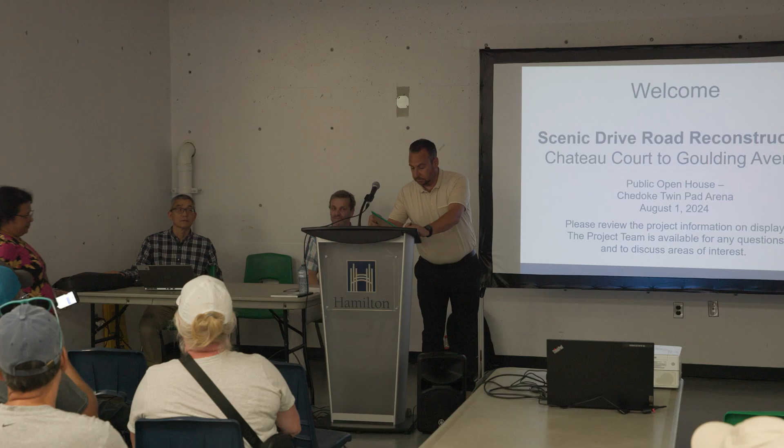Good evening, everyone. Hope you can hear me okay. I want to thank you all for coming out for the meeting today. We want to discuss with all of you the Scenic Drive road reconstruction, which is planned to start in 2025. You just saw phase 1 of the Scenic Drive construction last year. We started early last year, finished off early this year. So you have seen some of the work that has happened in phase 1, but we want to show you what we are continuing with in phase 2 as well.

We do have some plans for phase 3 and phase 4. We are not there yet. We have continued plans of continuing on Fennell Avenue with this whole construction. What we would like to do today is introduce the project team that is available here for any questions. I'll do a brief presentation for all of you. It is almost the same things that you saw on the display boards, but they will be able to explain it further. And if you have any questions, we are here to answer. We do have people from various different departments of the city.

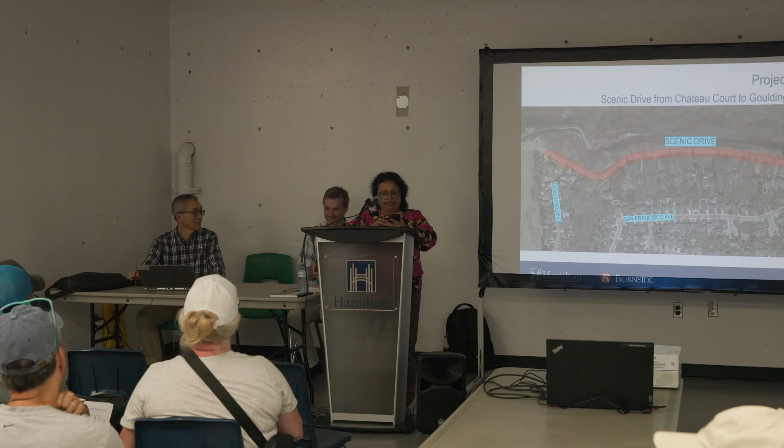The few other members that I want to introduce are Ji Zeng. He is up here. He is the project manager from the City of Hamilton, the lead on the project. Omo Ajay is the senior project manager, works along with Ji. So we have a good team here to be able to answer any of your questions. We have Prashveen Bhatt. He is at the corner there, and he is a design technologist. And as the Councillor already introduced, Caroline Ryle, she's the Director of Transportation, so she's here to answer any questions related to transportation issues, traffic issues.

Good. Alright. And we have Becky. Becky is also a project manager from the City of Hamilton in the transportation section. Wes Kinley, he is the manager of landscape architecture. Any questions related to trails, lookouts, anything related to trails, he should be able to answer that. So we have a whole team in front of you. Should I cover everyone? All right. So with that, I hand it over to Wojtek, who will be taking you through the presentation. Thank you.

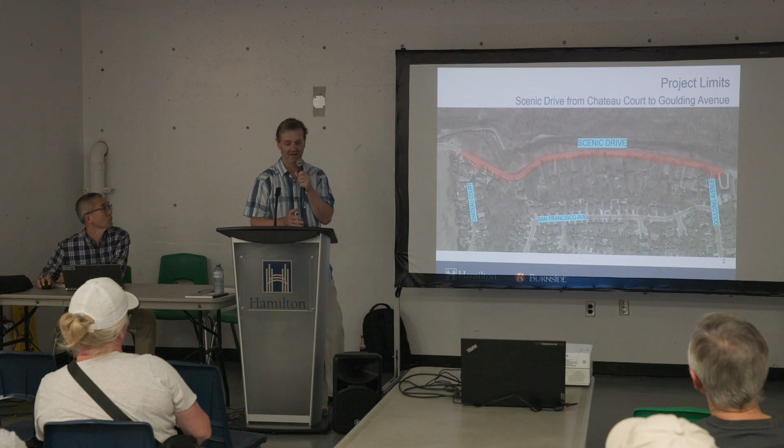So an approximately 3.5, in some locations 3 meter, multi-use path will be provided on the north side. And this will be along the escarpment, including nice iron face fencing. And on the south side, we are proposing the sidewalk that is mainly directed to the local community for safety walking improvements. And this sidewalk, I'd like to mention, will continue going west from Goulding and will be extended in the future up to the Guard Street.

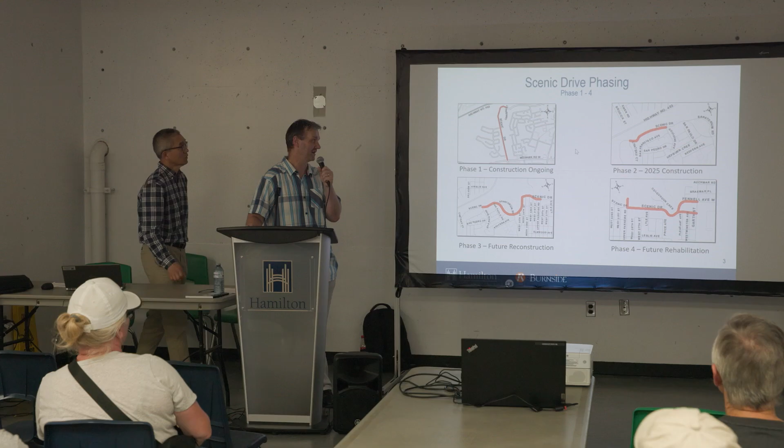I'm sorry, I have to go back 2 slides. So as you probably know, because I assume there were previous presentations before, the whole reconstruction of Scenic Drive. I can give a description of this one. So as part of the city's ongoing efforts to upgrade our infrastructure, Scenic Drive is scheduled for improvement.

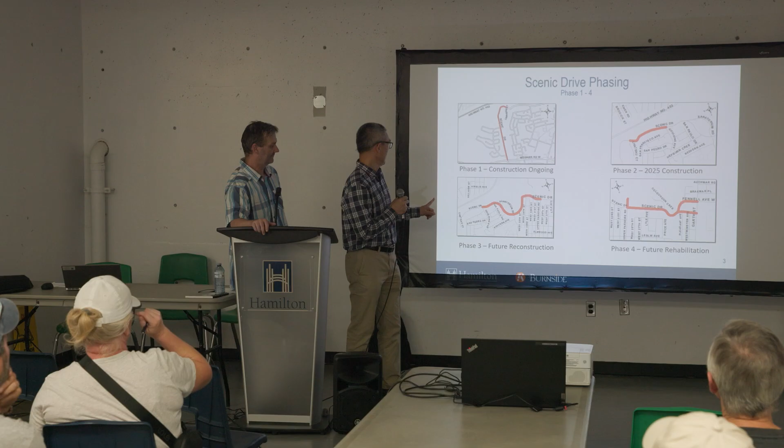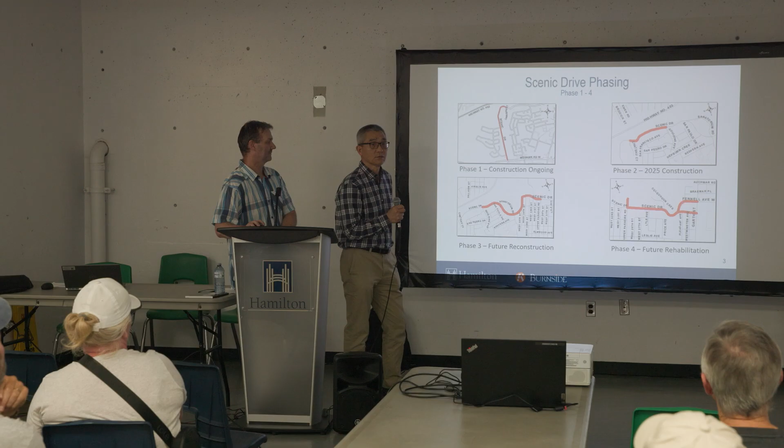Yeah, this is an overview of the area of the whole Scenic Drive Reconstruction Project, which, as you mentioned, phase 1 is completed, I assume, right now. Phase 2 is from Chateau to Goulding, and this is the subject of today's meeting, and then phase 3 and phase 4 will happen in the future.

So this section, phase 2 of Scenic Drive, will include, as I mentioned before, a sidewalk connection on the south side. So on the west side, in phase 1, which is already completed, you probably have seen there's a new sidewalk already on the north side. But then at the limit of this section there's an already constructed signalized pedestrian crossing to the sidewalk on the south side, and this will continue through this section.

Multi-use paths similar to the sidewalk will be extended to the next phases, and will continue along Scenic Drive up to the Guard Road, or almost, there's a little section that's not at the Guard, but basically the whole north part. So the multi-use path starts basically with this existing parking lot with the currently constructed pedestrian crossing, and the multi-use path will continue all the way up to the Guard Road in the future.

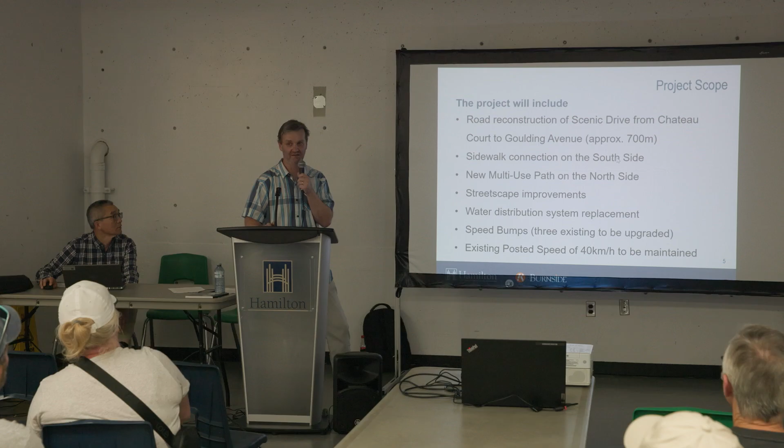It is intended that most pedestrian traffic in this section of the road and all bicycle traffic will be on the multi-use path on the north side of Scenic Drive, as it's more appealing to use it instead of walking in front of the houses. And most of the trees on the escarpment will be maintained. As per current design, I think we have 4 trees to be removed, but at the same time we are planting 24. And all major trees will be maintained on the north side. And there's not a single tree to be removed on the south side in front of private houses. It will not be removed.

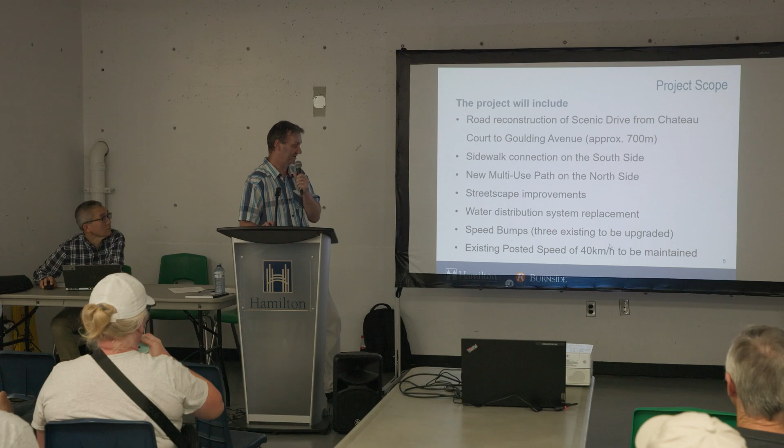Another improvement is water main. So water main will be replaced and upgraded within the scope of work throughout this whole section. Currently the posted road speed is 40, and it's assumed that it will be maintained as 40 kilometers per hour.

Speed bumps: there are existing speed bumps in this section. There are 3, and they will be reconstructed and updated to the current standards. There is also an existing parking area in the middle of this section on the north side. There's parallel parking, and it's hard to say how many parking spaces there are right now. I assume 6 to 8 vehicles. As per the current design, it will be reduced to 4, most likely, but this is still ongoing.

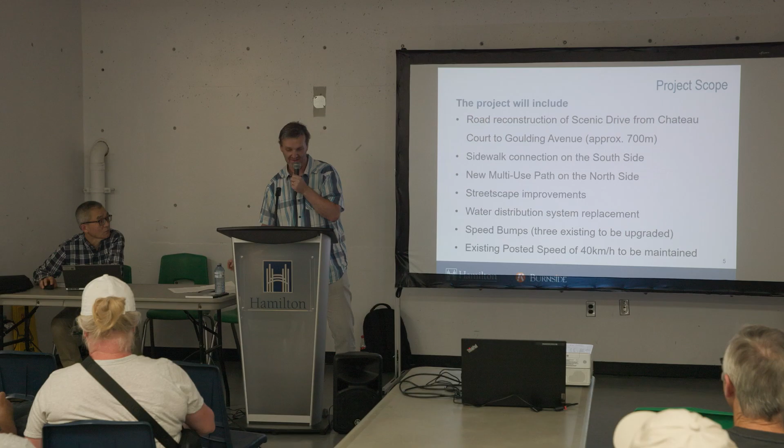So as I said before, the west limit of construction is, so this is Chateau Court, about 50 meters west of Chateau. Right now it's clearly visible where phase 1 is finished, with the start of the multi-use path from the parking lot. There's currently an existing pedestrian crossing here.

The multi-use path will be away from the road in some locations, and wherever it's not feasible, it will be located behind the curb, but not exactly behind the curb, so there will be a safety buffer of a minimum of 0.6 meters. All private driveways will be, if necessary, reconstructed and upgraded, because when I did a site visit of the city, some of them basically collapsed, so those will also be replaced and upgraded.

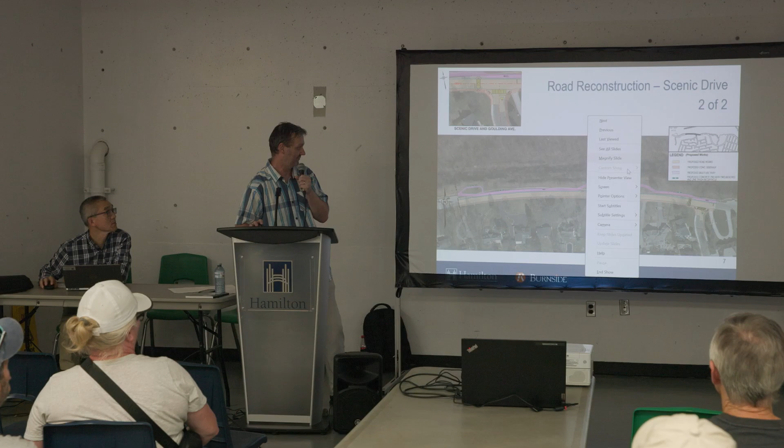I forgot to mention, at both intersections that are included in this phase of the Scenic Drive Reconstruction, new pedestrian crosswalks will be installed, including AODA compliant curb depressions, tactile plates, etc. So there will be an additional crossing across Scenic Drive, just west of Goulding. Again, this is for safety, because right now we know everyone is walking either on the street or in the boulevard, depending on the weather.

So this is the view from our 30% detail design, so more detail, but I included this view just to show the outline of the properties and houses and where they are. In general, the width of the road platform is currently approximately 9 meters, and this will be reduced to 6.5, two lanes 3.25 meters wide. Because of that, this will provide the platform for the sidewalk on the south side. Not in most cases, but for example at this corner, we are increasing the horizontal curves for safety and visibility issues, but this will pull the existing edge of asphalt away from the houses.

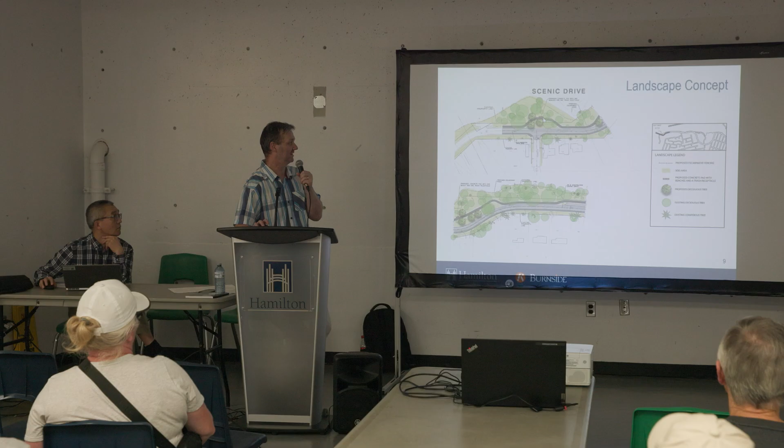At the same time, existing illumination along the road will be replaced and improved with LED lights, and wherever necessary, solar power illumination will be installed along the multi-use path wherever it's away from the road and wherever the lighting standard requirements are not provided.

Along the whole escarpment of the road, the design will provide a 60 inch tall, or 1.5 meter high in metric, iron fence for safety constraints, and there will be a total of 5 viewing points with benches along the corridor, with one view overseeing the bay and the city with the bench exactly in the middle of this section. All the benches will be placed on concrete pads. Some of those benches will be single and some will be double. And those are some landscape features.

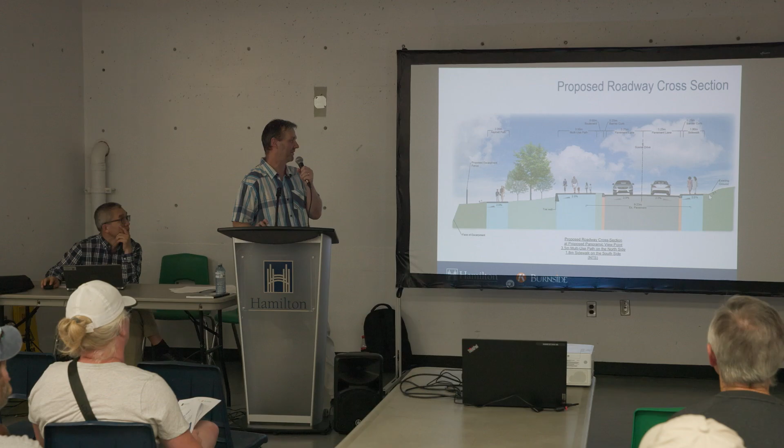This is the typical cross section wherever the multi-use path is close to the road. As I mentioned before, the multi-use path on the north side will be placed a minimum of 0.6 meters from the back of curb, providing a safety buffer for walking pedestrians or riding bicycles from the vehicles. And on the other side will be a 1.8 meter sidewalk. This will be graded into the existing embankments and areas in the current location, but there is no place where we will be going outside the road property into private property with the grading.

Proposed fence, as I mentioned before, will be along the whole escarpment. So this is the section where the multi-use path is just next to the road, and this specific location is where we will have this nice panoramic view. So that's the specific location of that section, basically.

So multi-use path, then trees and asphalt path with double benches. As I mentioned before, 24 trees are currently planned to be planted. So all those trees with a dark green canopy, those are proposed locations for the trees.

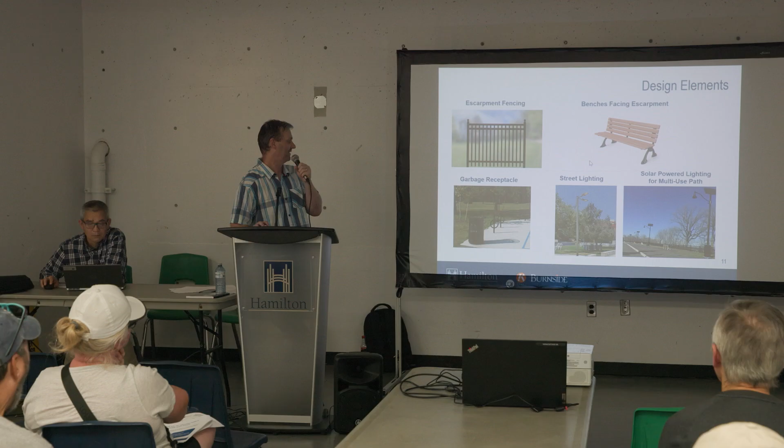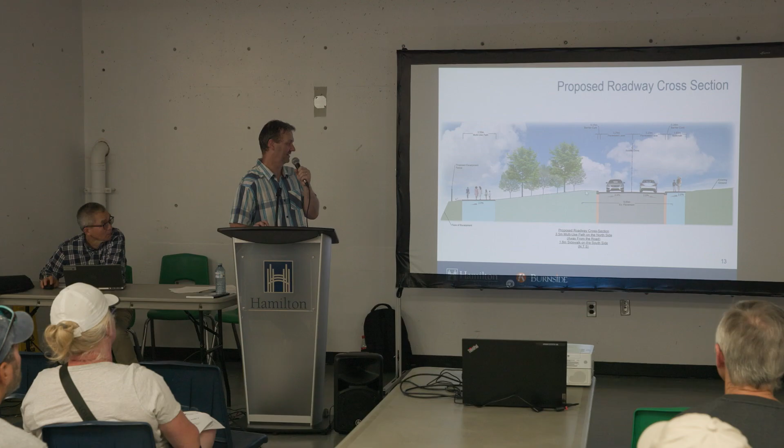So this is the second typical section of the road where it was feasible to pull the multi-use path away from the road. Again, we try not to interrupt existing trees and keep it as much as possible as it is.

So, just in general, this project is supposed to enhance a city-wide cycling network. It connects to places and areas for recreation, enhances existing pedestrian and cycling connections for active transportation, and it supports complete streets design as per the city manual.

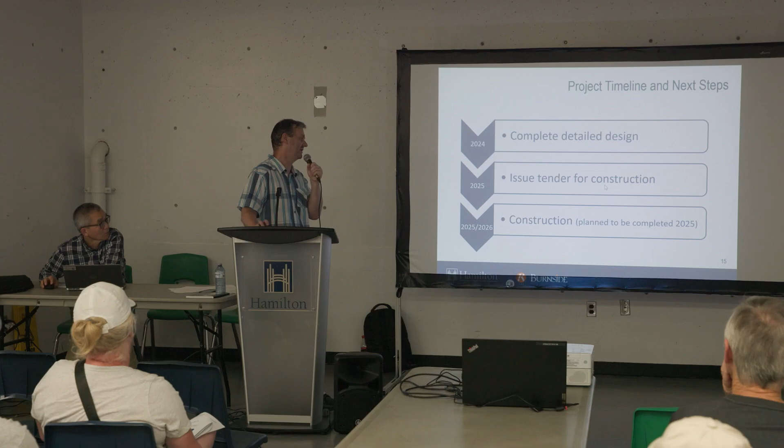So this detailed design is planned to be completed by the end of this year, and it's going into construction next year, and it's supposed to be completed by the end of 2025, but it depends, it might be going into early 2026.

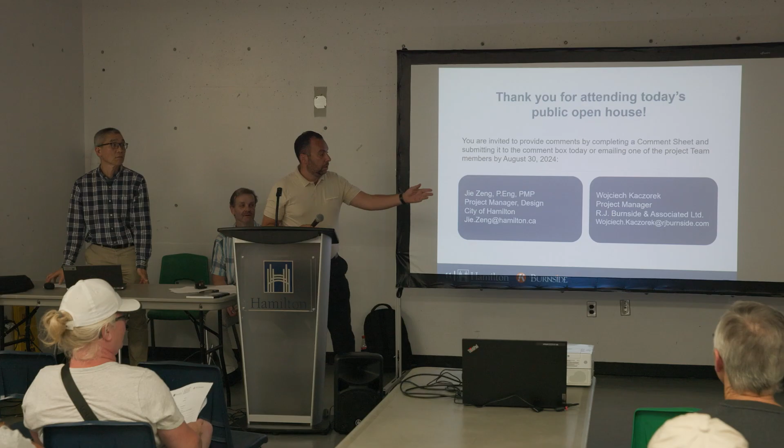So lots of information. Everybody's had an opportunity to get a package from our staff. There are no packages left, and there are a lot of us that don't have them. And they aren't producing them. Here, never mind. Okay. So we will email them to you. No, I would like one tonight, please. No problem.

Okay, so we probably have a lot of people that have a lot of questions, so I think that'd be the best place to start. So we'll open it up, and then depending on what the question is, we'll look to which staff member would be best to answer. So, sir, I know you had your hand up, so we'll start with you and then go around.

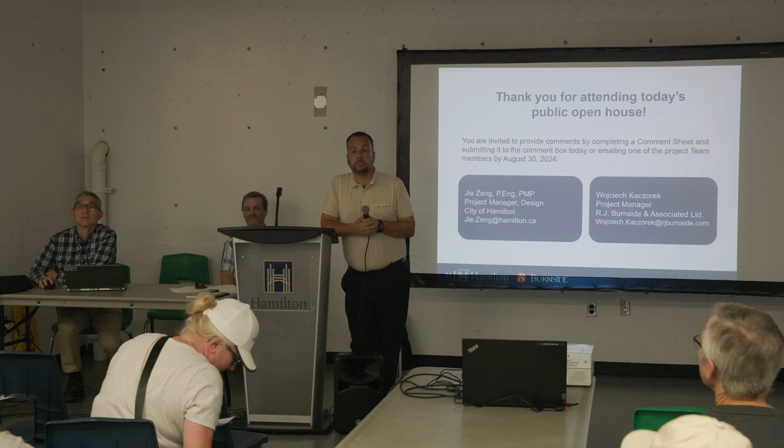Okay, sure. The main reason I'm here is that my neighbor reached out to me. We all knew about the multi-use path on the north side, which is a great idea. The sidewalk on the south side, that makes no sense to us. It seems redundant and a waste of money.

You already have people on the other side, we see them all the time walking through there, they've cut their own pathway. So I think aesthetically, it kind of takes away from the charm of the neighborhood. So that's why I'm here, to get my voice heard, and all the other people feel the same way: love the project, but the sidewalks, we don't need them. Okay, so I'll let the director answer that.

Thank you. Good evening, Carolyn Ryall. Good question. We were anticipating there was going to be some concern around the sidewalk. The purpose of the sidewalk is that we're more worried about connecting the community. The multi-use path on the one side is going to have a lot of active transportation, walking and cycling. But for the sidewalk on the other side, because this is the second phase, the intent is to have the eventual link up of the sidewalk to the other phases throughout the corridor.

We're adopting complete streets, which is trying to encourage active transportation, walking and cycling in a safe environment. What we deal with on a regular basis is that when there's a lack of infrastructure, it increases speeding on the roadway. So we're really trying to take a complete streets outlook, which was approved by council, trying to narrow the platform and make it more livable and walkable for the residents in the area.